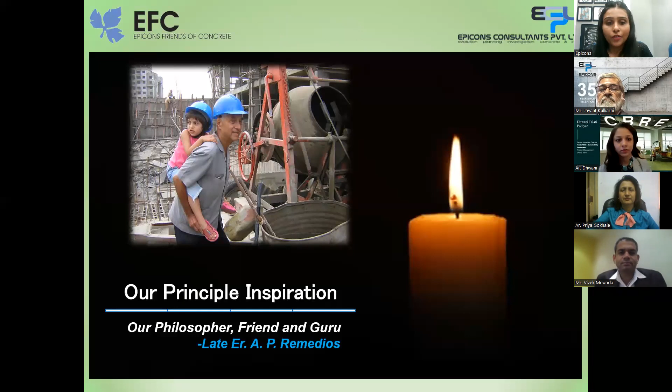Our principal inspiration, a philosopher, friend, and guru, was late engineer A.P. Remedios. EFC has conducted 79 workshops in the last 21 years and 32 webinars in the last 2 years. We started the webinar series since lockdown through our unit EFC dedicated to training. EFC is a humble effort to create a knowledge sharing platform and develop a facility for continued education for practicing architects, structural engineers, corporate consultants, government and semi-government authorities, builders and developers, faculties and students.

This is a timeline of our previous webinars conducted, and today we are presenting before you our webinar 132, Think Beyond Green, Part 1.

This is team EFC, our pillars of team EFC. So Mr. Jayant Kulkarni, our managing director, our directors Mr. Anand Pulkarni, Mr. Ravindra Deshpande, Mr. Arvind Parlekar, and our unit heads Mr. Parashar Moghe and Mr. P.P. Pandey. Thank you so much. I would request Priya ma'am to please continue ahead.

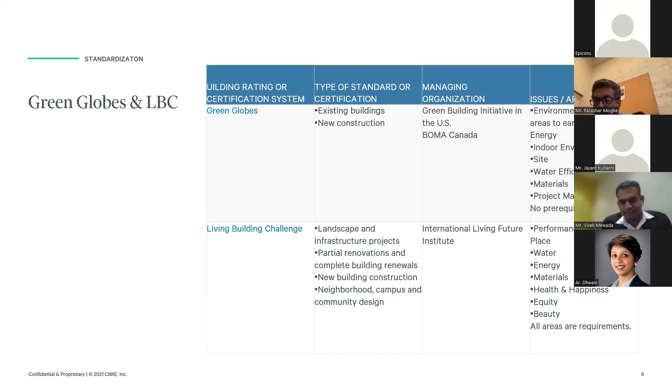And that's what you can all put together to call it a good vibe. There are various certifications around it. Like WELL certification is one of them, which is a global certification. In fact, I happen to be a WELL AP when in India there were only about 13, 14 WELL APs. Now there are many more, and it's become almost a given for most multinational companies to go under a WELL certification.

It's administered by the International WELL Building Institute. And this, so to say, is the good vibe I was talking about. It touches upon various factors like air, water, nourishment, which is quite often ignored and forgotten, but an important part of well-being. When it comes to the built environment, what you serve in the canteen, how is it stored, and what nutritional messaging are you giving to your employees or inhabitants of that building or space through the design.

Biophilia, light, movement, thermal comfort, sound, material, mind, community, innovations - these are just some of the factors. They all seem like words at this moment, but give each word a moment to think about how it can impact the built environment. I can go on with this, just wellness and health being - I'm personally passionate about it and what it does to design.

What are the factors we can keep in mind as architects and engineers when designing a well building, a well space, or a well factory for that matter. But I'm not going to go too far into this. I still have Vivek also covering some site related aspects.

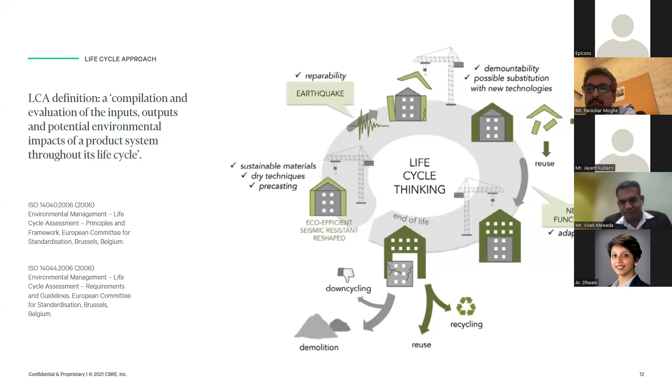The other would be being very footprint conscious. When we talk about footprint, very simply put, when you're walking on the beach, the footprint you leave behind means where you walked, how you walked, and how much pressure you put on the sand. Similarly, when you build something, there is a footprint you leave behind.

That is the amount of emissions you leave behind because certain materials were transported to the site from a longer distance than what it could have been if it was local. It's just one example, but across the life cycle there is a footprint you leave behind, and the smaller the footprint, the lesser impact you have on the environment. It is not rocket science, but this is very often ignored, and we should be very conscious about material selection and the processes we use during construction.

We can do this either through offsetting the energy, using green energy, so to say, solar energy, wind energy, etc., or offsetting it by generating energy in a green way in another location and offsetting its credits, reducing carbon emissions and energy use in general, through recycling and reusing. None of this is rocket science, and these are not new concepts, but it's important to put them in perspective of a built environment and a construction site, so that we as engineers are more conscious the next time we are on site.

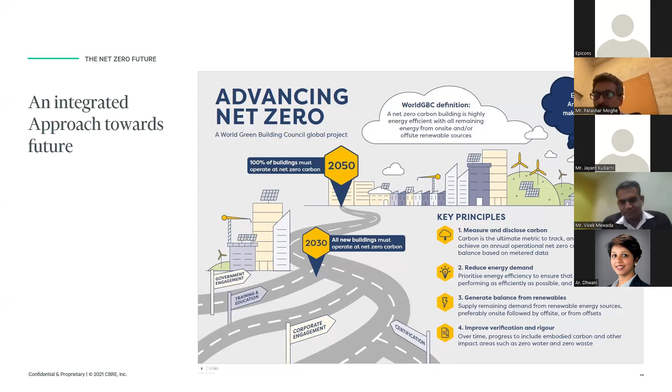This exercise should not be a one-time exercise where you've constructed, built, and forgotten about it. There should be a more regular, either quarterly or annual, performance monitoring. In fact, a lot of companies like Barclays, for example, that we're working with, have made it live monitoring, not doing it annually but doing it live, looking at performances. If there are any live tweaks needed, or a shutdown required because you are surpassing a certain baseline, those actions are taken immediately.

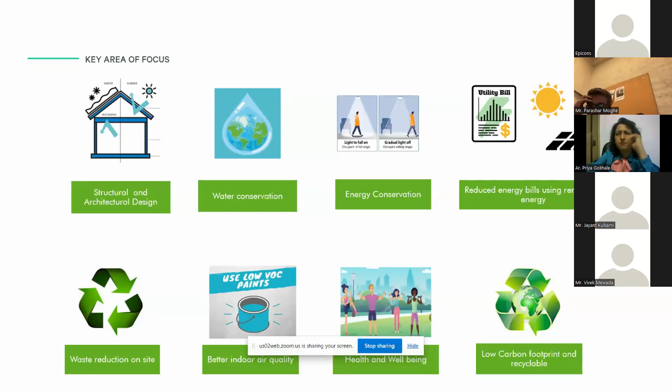Water conservation - okay, you have selected a tap, but are we saving the water? Are we preventing the leakages? Energy conservation - yes, energy is used for construction, but we have to look for every attempt to save energy on site, the usefulness of the energy which is there. Renewable energy, though on a site it becomes a difficult aspect, but we have to look forward to how we can incorporate renewable energy on site during the construction phase. I know everyone is aware how to source renewable energy during operation, but during construction stage, how do we harness it? I'll be talking on that in a bit.

Apart from that, waste is the most important aspect we have to look at. The quality of air which a person experiences on the site - it's not just work, but the kind of air going into the construction, affecting all the multiple stakeholders on site, the site engineers, the laborers, the workforce.

So the quality of air which is being brought into their body, what is the quality of air? And health and well-being - it's not only work, but how we take care of the health and well-being of the employees as well as the site workforce. That is also one aspect which I'm going to touch on.

At the end, something which Dhwani had described as life cycle analysis during her presentation - I'll be touching on the low carbon footprint and the recyclability of materials as one of the topics. So coming to the first aspect, the materials.

As a person, when we are on site, we go multiple times for material inspection. We go to the factory for checking the materials, what is the quality of the material and all. So yes, first thing is the quality and the desired specifications we require to meet. Yes, we put a tick box, but very few times do I look at the material from the sustainability aspect.

Or from the environment aspect - how local is the material, local in the sense how close it is to the construction site. That is one aspect which should be added while assessing any materials.

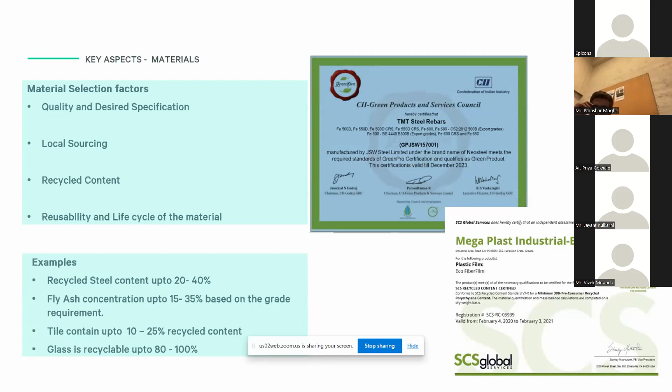Glass is almost recyclable up to 100% extent. If it's clear glass, yes, 100%. But when you go for colored glass, there are some limitations with respect to recycling, depending on the exact color and type. But yes, glass is almost 100% recyclable. I'll try to address this in waste management, how we take care of it.

On-site design has multiple parameters. I'm just touching upon 2 to 3 aspects to give you a flavor of what we should look at. During the construction phase, the water from the site, especially during the monsoon season, has very high runoff, and the topsoil is usually the one most affected by that. So incorporation of a silt trap basin in the design helps to arrest the topsoil to a considerable extent.

Apart from that, the topsoil which we are using by default, we can stockpile up to a certain extent on the site. The reason for focusing on topsoil is that it is the most fertile soil in the entire land, because it contains minerals in the highest proportion. So we need to stockpile that, cover it with tarpaulin or polythene sheets, and save it for later use during the project execution.

Coming to solar installations, a practical problem we always face on site is that at times solar panels are just placed for environmental compliance sake, or just because the client has said he wants to install solar. They don't look at what angle they are inclined to, or whether there is any shadow coming from the OHT tank or from a nearby structure. So those are the principal on-site factors one should look at while installing solar panels.

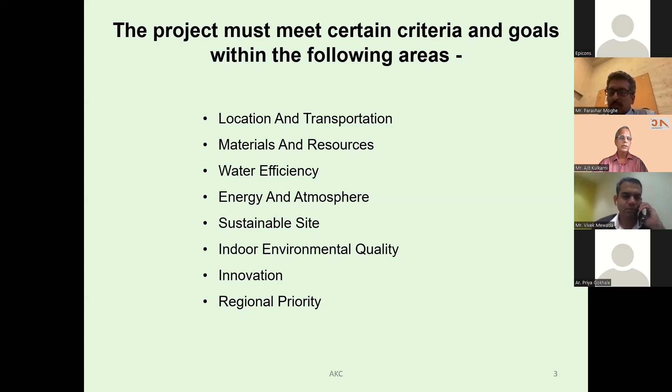So as we know, let me quickly say about the green topic. This initiative was started by LEED. If we want to achieve credit points: 40-49 is certified, 50-59 silver, 60-79 gold, and 80 plus is platinum. We must have certain criteria covering location and transportation, material and resources, water efficiency, energy and atmosphere, sustainable site, indoor environment quality, innovation, and regional priority.

What we actually get is something good for humankind: CO2 emissions about 34% less, energy consumption nearly 25% less, and water consumption 11% less. We also get a healthy atmosphere, efficient facility, cost saving proposition, and many more. So it's not only the LEED certificate we are going to get, but what we give to humankind, the necessity and requirements that are there.

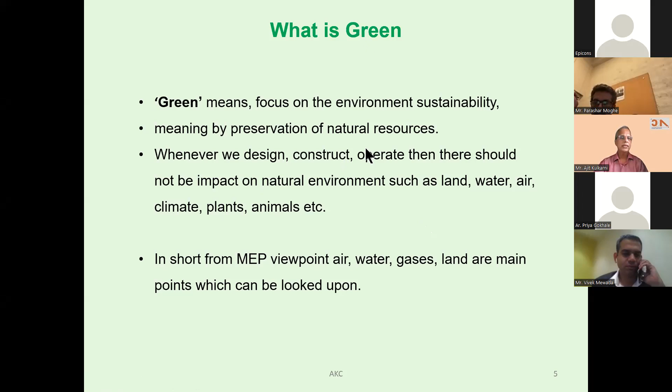As Dhani has already mentioned, by and large green means focuses on environmental sustainability. It means preservation of natural resources. So in design, construction and operation, there should not be any impact on the natural environment. As a designer, I have to see that land, water, air, climate, plants, animals etc. will not suffer. So in short, from the MEP perspective, air, water, gases, land are the main points which have to be looked upon.

Now along with green, there is a lot of confusion in the general person about sustainability, carbon footprint and efficiency, where it fits. So sustainability is nothing but reducing the environmental impact and considering the human health factor. You have to consider natural production of energy which will not harm the environment, use energy that can continue forever, and not disturb natural resources, which is important.

From the carbon footprint point of view, it's the amount of greenhouse gases such as carbon dioxide, methane etc. which we release into the atmosphere while designing. Also we use CFCs and other things which are very harmful. And from the efficiency perspective, we have to make sure the efficiency is very good, rather than just maintaining the LEED perspective.

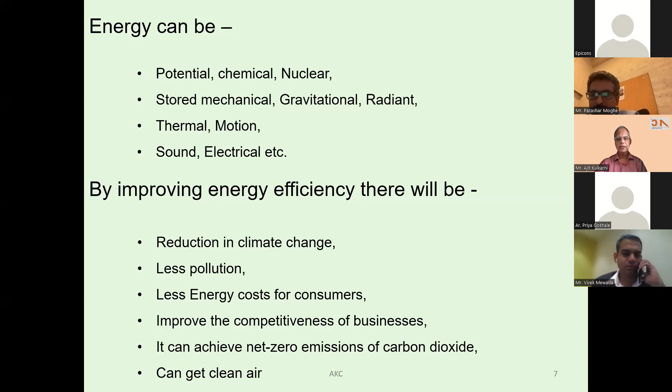This is after having the Bhadla plant, which they made in Rajasthan. We improve the competitiveness of the business, get a net zero emission of carbon dioxide, and cleaner air. So therefore, we have to redefine this green a little bit while designing, constructing and operating.

One point is to improve energy efficiency. There has to be some environmental sustainability, preservation of natural resources, with minimum impact on land, water, air, climate, and plants. We have to consider the human health factor, use natural products and energy which will not harm the environment, use energy that can continue forever for the long term, and reduce the use of greenhouse gases which affect human beings.

Now we have a lot of technologies available which we are also implementing, but to cover all these points and fit them into half an hour from the MEP perspective is very difficult - it's really a Herculean task. But allow me to touch upon some new trends happening, since we are going beyond green. I would like to touch upon new things which are happening, or which are not happening but which we will implement, and developments happening in the sector in future. This will become an interactive session too.

It will be interesting for everyone, because all of us know about rainwater harvesting, solar, wind etc. But there is something else we must now look after, because of the new era we are going into. There are certain available technologies, but we are still not practicing them fully - we are not practicing even rainwater harvesting 100%.

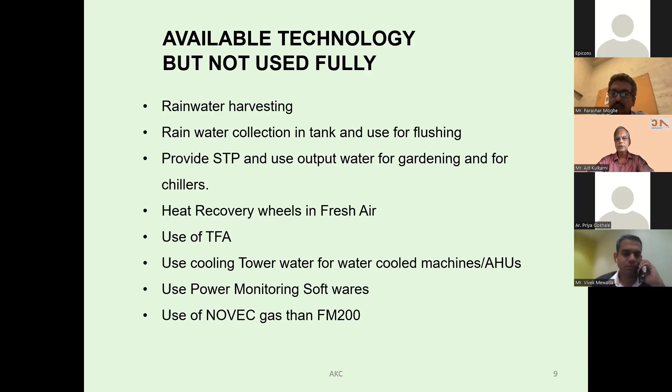Then there's Novec gas, as all of you know, instead of FM200 which is CFC related. Novec is a clean gas, so by using it we can reduce the carbon footprint and ozone depletion. Then there's another topic of discussion—fabric ducting.

GI ducting versus fabric ducting is the new technology coming up. At certain times and locations we can definitely try to use it, whether at a warehouse or at an exhibition hall. Then VFDs for motors—if we put them on small motors, there's a lot of saving that can happen, yet we are still apprehensive about using that.

The power factor in the electricity industry is another topic to be discussed at length—you could spend at least one full day on power factor and harmonics. But improvement has to be done here so that your energy consumption gets reduced.

This widely discussed topic—solar water, solar panels, wind generation—we can definitely use, utilizing whatever extra galleries, ceilings, or terraces we have, and the roof of the industry, to reduce consumption. I have examples where this has been installed and implemented; in one factory, zero electricity is being used and the entire power is coming through solar panels.

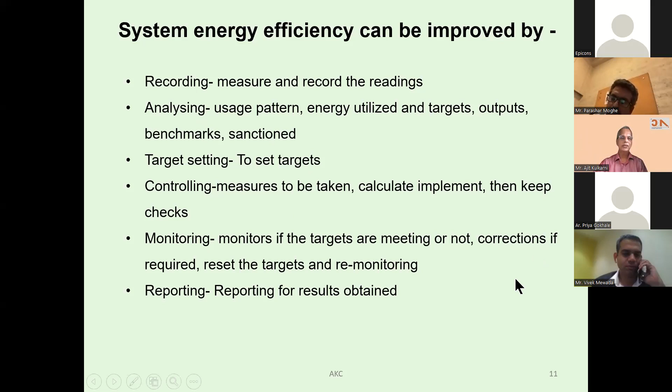Otherwise, many times we put up a wind energy setup and subsequently we land into only 5 or 10% savings, considering the energy that went into creating that equipment and the material used there. So therefore, efficiency is one part which I would like to touch upon.

And before going into that, I would like to go into a few terminologies. Now, efficiency, when we say motor efficiency, if we consider, it can be 70% or 95%. Now, suppose efficiency is 70%, then electrical power will be drawn by 107 kilowatt.

Before coming to this slide, I would touch upon these 2-3 lines for the benefit of all the participants. Whereas when your efficiency is 95%, then the electrical power gets reduced down to 79 kilowatt, so a direct reduction of 20%. So do you mean to say we should start changing the motors, scrapping the machines?

No, not at all. Wherever it is possible, we should replace it. But if it is a new thing, then definitely we can think upon how we can do this efficiency improvement into that.

Now the main thing which is happening is, we have to think in a different way, because we are in the area and era of digitalization. So can we make this efficiency-related business, instead of writing and putting it onto a platform and being dependent upon human technology, can we do something over here? And therefore, this is the new thing which we can definitely come up with.

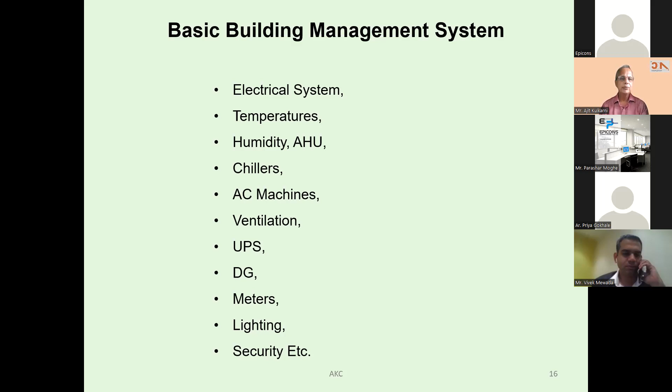So this is a very basic building management system which we are doing, not compulsorily, but sometimes. There is an electrical system, temperature, humidity, AHU, chillers, AC machines, ventilation, UPS, DG, meters, and lighting. This is the absolute BMS machine.

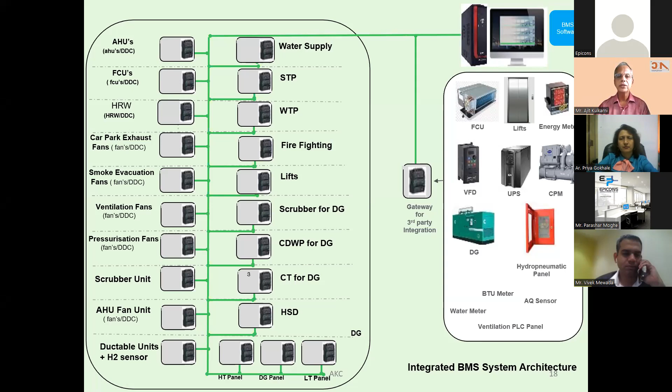So with this we have arrived at some BMS, which is a higher technology. And the further advantages which we wanted, we were not getting, we intend to get in the future technology, which is Industry 4.0, which is yet to come into the market and which will be the future.

So what we get over here, this equipment can be monitored finely. You can have the operations verified minutely. Performance can be checked and monitored. Data can be used for predictive maintenance and performance.

Now this is a very important thing. There are certain things we always provide, okay, I have provided a fire pump. But unfortunately, during the last fire which happened in Mumbai, the fire pump itself was not working. This is a very sad story. We talk about lots of things, standards and all that, but when it comes to ground reality, it doesn't work.

We talk about STP, okay, I want this STP and the output has to be connected for the chiller etc. But really, whether it is working, whether the material is there, what is the output, what is the yield over there, that is not being given. At any given time, if the shaft breaks, then the motor will not function and you are not getting things. So that's the predictive maintenance you can get from it.

Then there is another thing, asset life and value to be checked. You have got a lot of assets, many assets, crores of rupees of assets, billions of rupees of assets, so many solar panels. Where are they now? What is their individual condition? What is their value, and whether they are functioning or not, that is what we want to check up.

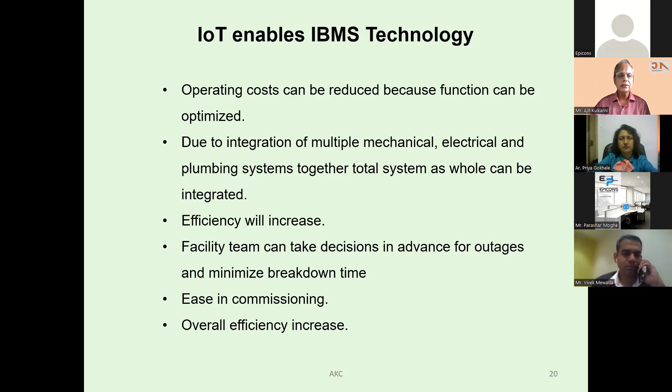This is what minimizes the breakdown, this is what I have based this upon. Many times urgently we have to take certain decisions, and IT people or the client don't give the breakdown. At that time we have to take decisions, and those early decisions, the downtime reduction, and the loss of revenue which is happening can be addressed with reference to this. There's an ease in commissioning, and therefore it improves the overall efficiency of the organization.

So this is where we are. I will not go much into the technicality. I know there are a lot of architects, structural consultants, PMCs here, but it is necessary for all of them to understand this small level, what we call the site level, wherein all the MEP related equipment is there, be it DG or HVAC, chiller, etc. So that is called the third party, and that is called the field level.

The second level is called the management level, wherein there are various softwares, and all these third parties are integrated with each other. Now BMS has got their own function. EPMS, meaning Electrical Power Management System, has got its own system. This DCIM, Data Center Infrastructure Management System, will have their own software.

Now all this software will start collecting the data at the field level first, then they will talk with each other, and overall they will feed into the BMS system. And not only that, further they will be connected onto the cloud, and therefore this IoT as a managed service will be available at the cloud.

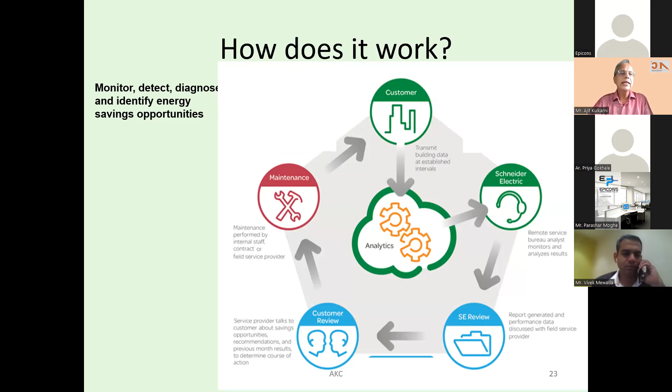They will collect all this data, which was given to the client, onto the cloud, for the client. So it will work on the customer side. You have remote sensing, report generation, service provider customer views, maintenance performance. So you get to monitor, detect, diagnose, and identify the energy saving.

Now what you get in a nutshell, if you see the last column, the outcome is nearly 33% reduction. This has been analyzed worldwide in a few sections. 20% reduction will be there in energy cost. You get reduced unscheduled maintenance of 29%, and 80% of the problems will be resolved remotely, which were not being done up till now.

How it will happen is that it will be monitored. The analytics which will be built in by any organization will do the analysis, the report and collaboration will be done. The remote support will be available to anyone, and then on-site management is there. So it is machine-to-machine talking, machine to human talking, human to human talking, and human to machine talking. So all these platforms are on one side.

Do you mean to say we are going to eliminate human intelligence? Absolutely no. We are going to utilize the human brain very efficiently, but we are making all these machines work. Up till now we were working for them; now we'll ask them to work for us and give the respective data so that we can get increased occupant comfort, reduce operating cost, and improve asset value.

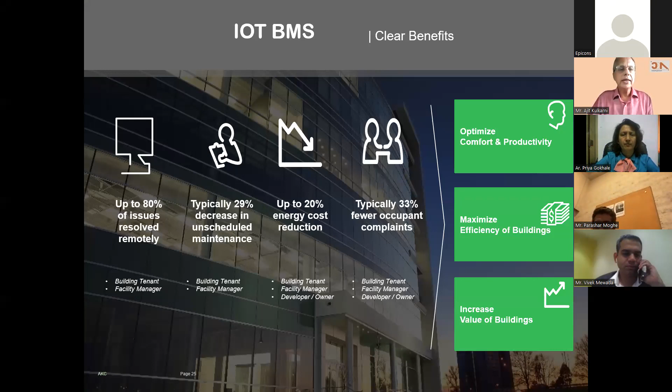We were over here. So in a nutshell, we are going to get nearly 29% unscheduled maintenance, 20% energy cost, 33% into occupant complaints, and 80% into the things.

Now this time and era is a global village, as we call it. So somebody is sitting in the US, somebody in Singapore, somebody in India, somebody somewhere else. The management could be different. Somebody is talking to their management in Bangalore from Boston, as Obama has mentioned. So everyone must be aware of what is going on at every site.

So being on the secure cloud with the security available, and through all the gateways, what we are going to collect - desk occupancy, ceiling occupancy, air quality, people count, people flow count - all of this will be available on the universal platform. So any decision at any level can be taken.

There is no necessity of taking a decision separately - this is the available thing. Whatever data you want to get out of it, any organization can do that, and subsequent to this, we can make it available. So this is as far as IoT is concerned.

I think I will now shift a little bit to the upcoming lighting management system.

Once we say lighting, go ahead, sir. How many minutes to go? 5 minutes. Oh, my dear friend, sorry, then I think I may have to wrap up quickly.

So this is a new lighting management system, wherein we have got energy saving, daylight harvesting, color changing, visual comfort, dimming, scene selection, human centric, asset tracking, and space utilization.

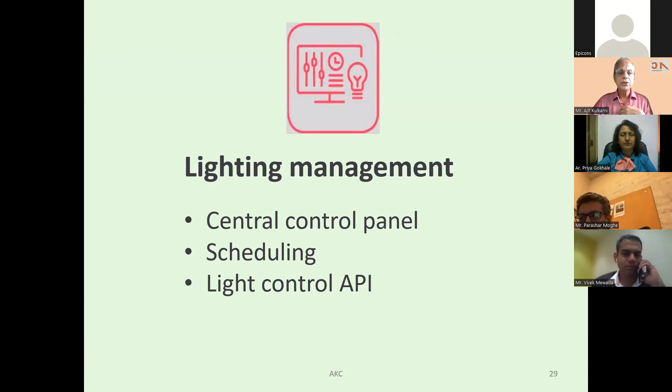What we are going to get out of this lighting management is a central control panel, scheduling, light control API, lighting asset management, maintenance information, alarms, automatic notification, and automated emergency testing.

You can get energy optimization through lighting behavior, daylight harvesting, energy dashboard, and energy analytics. All these I can take up in your next question answer session. Scene management we can do with this energy management.

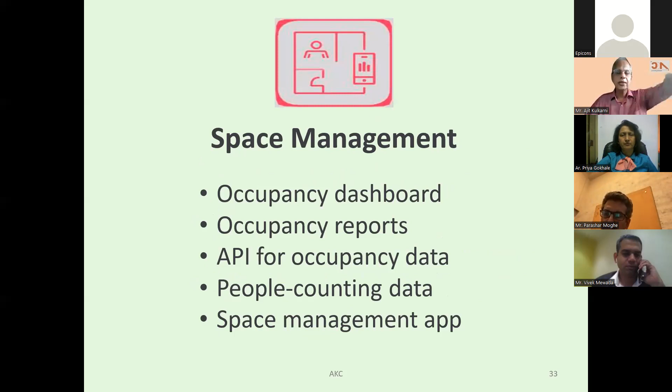The space management is a new trend wherein hot desking is there. You need not have one particular cabin or one particular desk. You can select, and for that you have got software available to you, along with indoor navigation, so that anyone can sit anywhere.

Then there is a bioadaptive light. This is a tunable white light with a program, so that everyone becomes efficient. Environmental monitoring for temperature, humidity, and all that can be captured through this.

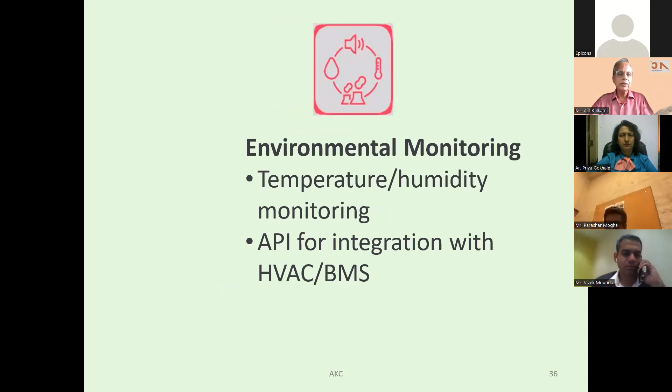There are intelligent sensors in the light fitting, bundled into the advanced sensing platform. We are going to get room temperature, occupancy detection, relative humidity, daylight measurement, desk occupancy, people count, temperature, noise level, indoor positioning, and navigation.

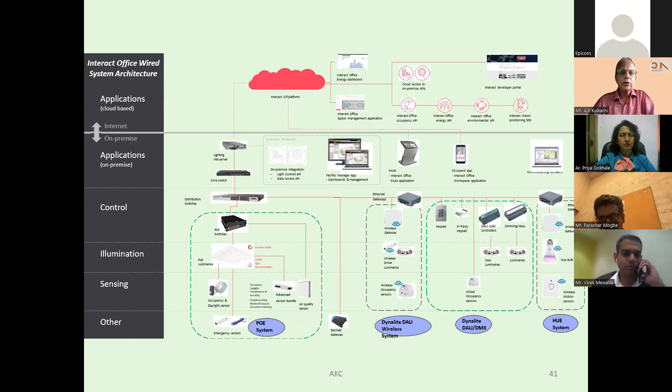May I request 5-10 minutes more, Jayant Kulkarni or architects, Gokhale, please? I think we can give 5 minutes, there is no issue. But still, if you limit to 5 minutes, it will be better. Okay, anyway, thank you for that.

Safer and more productive environment is what we can get from this. We can get improved staff efficiency and minimize energy consumption.

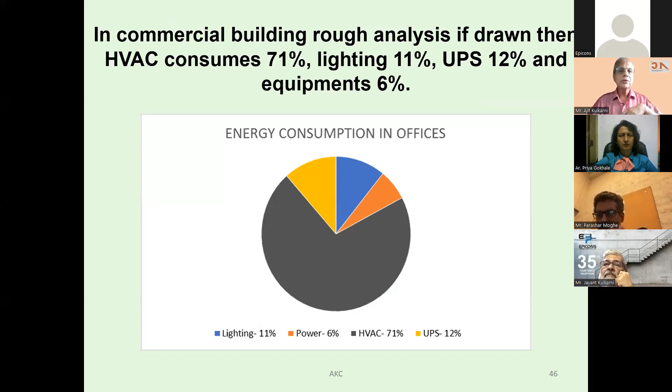Now, this 5 minutes which I wanted is for HVAC consumption. HVAC consumes nearly 71% and it's a big guzzler in our industry. So out of that, we can get VRV, which has got lower tonnage kilowatt per ton, as I mentioned. We may opt for it, or whenever chillers are there, we can go with water cooled chillers.

We can also obtain further HVAC efficiency through insulated walls and ceilings, reducing heat generation from lighting, and designing spaces to avoid losses through leakages. We can use double glazing with lower emissivity windows, and we can use blinds.

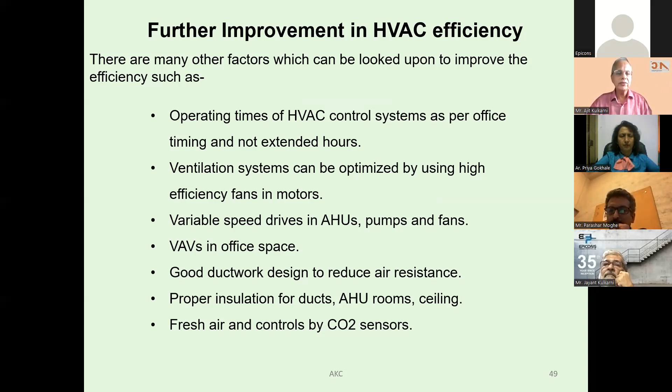Temperature can be increased a little to 24 degrees. We can go with operating times, so that whenever people are going to come, at that time only we start the chiller. The ventilation system can be optimized, variable speed drives of the AHUs can be used, VAVs will be there, ducting work can be done properly, proper insulation can be done so less tonnage will be there, and fresh air will be there with CO2 sensors.

This is a new thing which I will just take 1 minute on. This is absolutely new, 2022, it has been introduced.

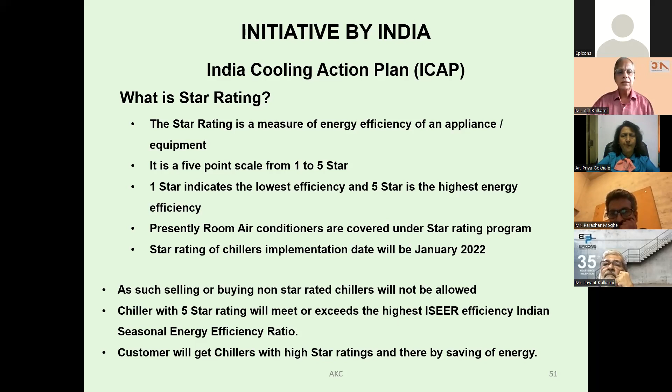All the people who are using chillers can put this into service. This is the 1 to 5-star system which has been brought in by the India Cooling Action Plan. So whenever you are going with a chiller and ordering a chiller, ensure that you are getting a star rated chiller, so that you can get high efficiency and less kilowatt consumption.

There is a new thing, as you are aware, BIM, which is Building Information Modeling, now getting adopted where architecture, structural, HVAC, electrical and plumbing are coordinated. Clashes are found, and BIM is now widely used. This is a new trend.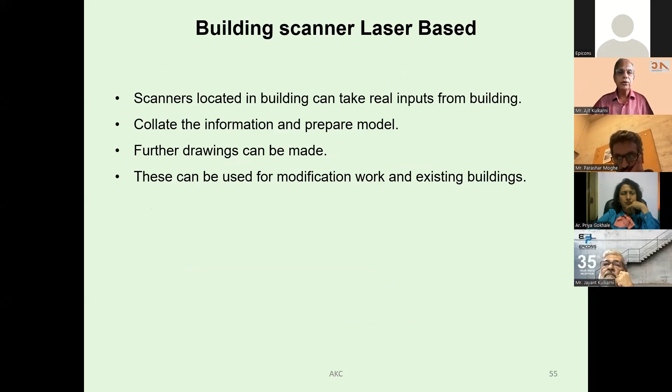Then building scanner and laser based technology, this is a new thing coming up in the future. These scanners will be located in the building, they will take real inputs where drawings are not available, collate the information and prepare the model for you. So you get the drawing available to you, and if you want to do modification, you have it.

So, concluding remark: energy is a major input for economic development for any country, and energy is required. Hence, in any case, the energy sector is very vital.

Today's luxury will become tomorrow's necessity. Once upon a time, the fridge was a luxury, now it is a necessity. What is in our hands is to increase efficiency and the technology to be used for the same.

Surely, we have the responsibility to leave for the future generation a planet that is healthy and habitable for all species. This is what Sir David Attenborough has said, and we have to strive for his words. Also, this has been said by Mahatma Gandhi.

At the heart of NCC is a similar passion to do the new, to make an everlasting contribution, to author a bit of history, a great story that never ends. Starting off as Nagarjuna Construction Company Limited, close to 4 decades ago,

It is visible, right? Hello? Hello? Yes, it's visible. Okay. Visible and audible too. Okay.

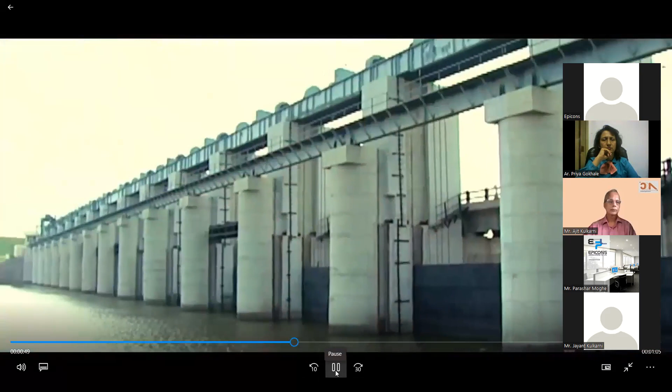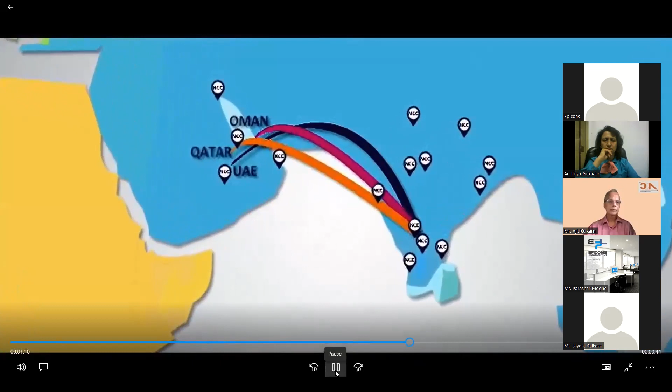We have worked unceasingly to expand our capabilities, our scale of operations, and our reach. Rechristened as NCC Limited in 2011, we are today a multifaceted infrastructure group with several focused divisions whose activities span the gamut of infrastructure space. The NCC saga has thus far unfolded not just across the length and breadth of India, but also on the international shores of UAE, Oman, and Qatar. The company's projects in the sectors of buildings and housing, water and environment, electrical, power, roads, irrigation, mining, metals, railways, and international have made it an integral part of India's infrastructure landscape.

At NCC, history is being created every moment. History that we can actually use to change the course of tomorrow.

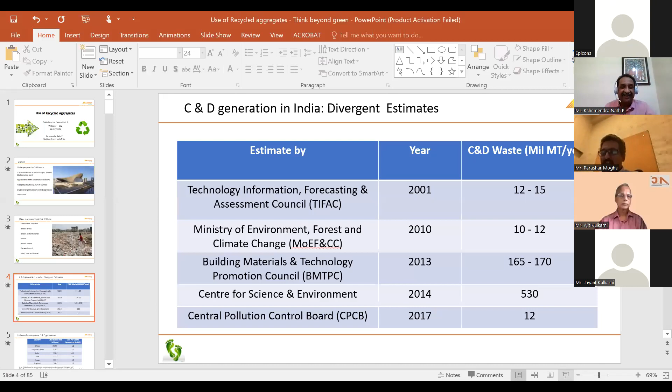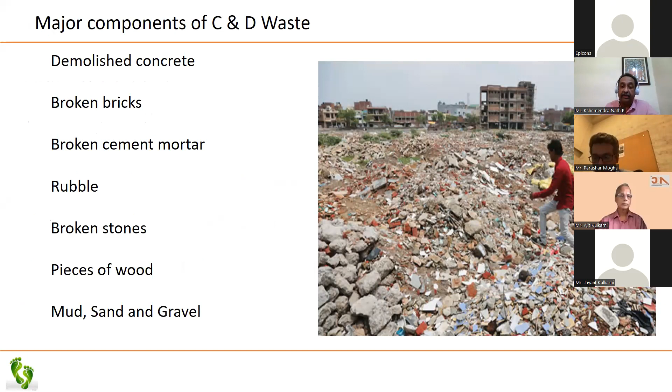This is how normal demolished C&D waste looks like, all mixed together. This is the biggest challenge a construction demolition waste management plant faces, and we are going to make recycled aggregates out of this.

If you look at the estimate of total C&D waste generated in India, it depends on which agency you talk to. The estimate ranges from 10 million tons per annum to 530 million tons per annum, a difference of 5,000%. This tells us how little we know about the waste we are generating, and if you don't know that, it reflects on what corrective action can actually be taken. It hasn't been scientifically looked at.

If you were to ask me where I'd pitch our total construction demolition waste, I'd say it's even beyond 530 million tons per annum. Why? If you look at C&D waste generation in other countries, China talks about 2 billion tons a year. By comparison, India at 530 million tons, on a per capita basis, is still at 0.4 tons per capita. Even if our construction activity isn't as big as China's, it's much bigger than the USA or Europe, going by our cement consumption.

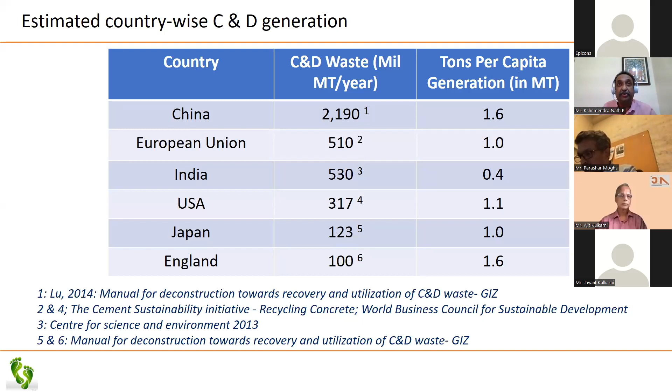So I feel our C&D waste generation must be much higher than 530 million tons, but that's speculation. We were associated with the Government of Goa to estimate the C&D waste generated in the state, and we also gave a blueprint for scientific waste management. In that process, we analyzed the waste stream and volume produced in Goa. It started with GWMC saying they wouldn't be producing more than 100 tons a day, but our scientific analysis came up with a figure of 525 tons per day. This shows how far we underestimate the generation of C&D waste.

Now, why is it important to understand and estimate this, and why is it important to control it? This waste is inert and doesn't smell, so we don't associate it with waste the way we do municipal solid waste. But it damages the environment to a very, very big extent.

Why is it environmentally damaging? Because this waste finds its way into filling up water bodies and low-lying areas. The National Capital Region alone lost close to 1,500 water bodies due to the dumping of C&D waste. Many water bodies in Mumbai are under threat, as are those in Bangalore, Hyderabad, and elsewhere. This is a very big environmental issue, and unless we take corrective action, it will create huge damage that we don't yet understand.

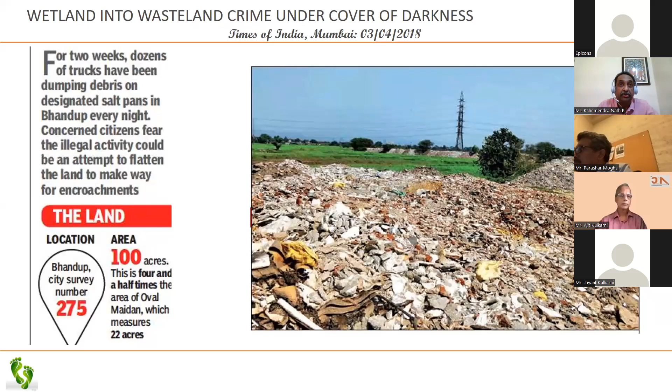This is another picture, familiar to those who know Mumbai, of the salt pans on the Eastern Express Highway where C&D waste is being dumped. People are apprehensive that this will be used to create encroachment into the land.

When we do this kind of damage to the environment without even thinking - C&D waste may not be the real reason, but C&D waste is used because it's the cheapest material to fill those low-lying areas. And then we complain about BMC not doing anything to control the floods. We are all equally responsible, and every one of us has got to see to it that we create solutions for ourselves rather than blaming government bodies.

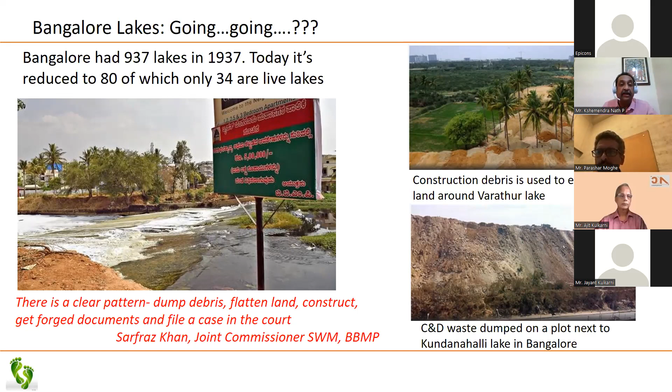Indiscriminate development has been a major problem in the whole world. From Dubai to China, reclamation is a very popular development model. Why? Because it's cheaper to make artificial islands through sand filling than buy land. We all know about these huge paradises made in Dubai, like the World and Palm Beach. 500 million tons of sand has been used to develop the World - that's equivalent to 20 million trucks. One-fifth of Singapore has been artificially added, with plans to grow another 100 square kilometers.

Sand mafia is the most organized criminal activity in the country. Just a couple of days ago, you must have heard the news that a high-ranking police official in Haryana was run down by the sand mafia. In Vasai Creek, near Mumbai, around 75,000 men work as illegal sand miners.

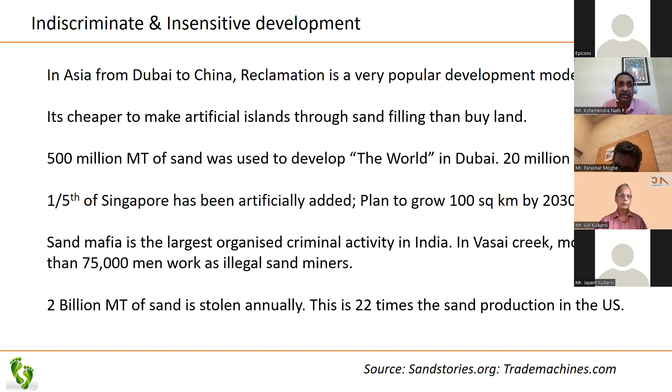So we have a lot of issues related to environment, political issues, and law and order issues. Sand and aggregates are the second most extracted resource in the world, even nine times more than crude oil. Aggregate demand has grown 360% in the last 30 years. China has used more cement in the last two years than the USA has used in the last century.

So this is the kind of development activity going on in this country. And if you look at the statistics in India, we will also find a shortage of aggregates to meet its projected demands. The BMTPC estimates that we'll require around 600 billion bricks and 400 million cubic meters of aggregates, plus another additional 750 million cubic meters of aggregates for road construction.

So where are we going to get all these aggregates in the future? Sand is not an unlimited resource, and we are depleting it at an enormous speed. So consider this - on one end, we have a huge environmental problem created by non-handling or mishandling of C&D waste, and on the other side, we have aggregates, which are a depleting resource, and we all know we will not leave enough for the next generation to build.

So this is why using recycled aggregates matters. I've said all this to set the scene for you to understand how important it is to use recycled aggregates for sustainability.

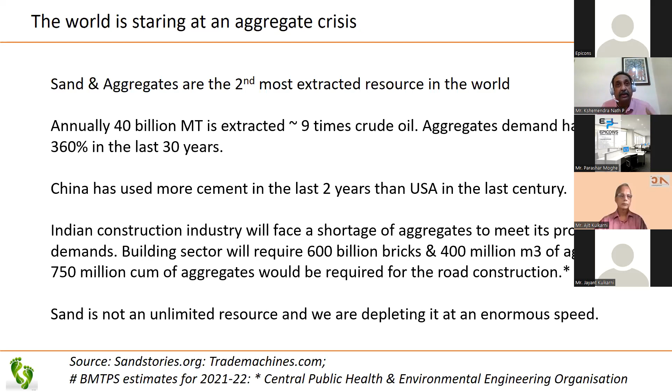20-25 years ago, if somebody were to say that river sand will not be used in construction and we would only use crushed sand, we would have mocked at him. Today, that's a reality - we don't have enough real river sand, it's no longer available. So we are in a changing environment, and we have to adapt to the situation.

And so a circular economy approach is the best way to resolve these issues. What's a circular economy? Instead of a linear economy where you extract, use, and dump, you produce demolished concrete that is used for recycling and put back into construction. Not more than 5% of the material goes into wasteland or landfill. This is how we need to approach creating a more environmental balance in the future, and also resolve the problem of the lack of aggregates.

How do other international, in the global powers, deal with this system? If you look at the US, around 23% of C&D waste is recycled. Of course, in the US, different states run at different speeds. New York has got the most stringent measures.

They mandate segregation of waste at site and allow only dismantling, not demolition, of buildings. This is a very important difference. When you dismantle a building, you make a planned way to salvage material that can be used later, and you only demolish the concrete, which is then recycled. What we do here is demolish everything, and you get a complete mix of material. It's very difficult to recycle.

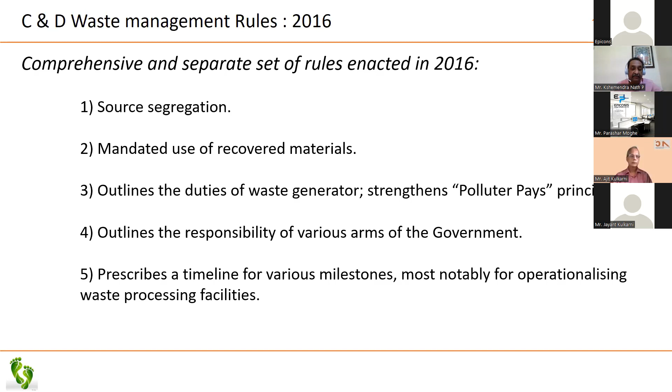The whole policy is based on the polluter pays principle. That is, if you generate waste, you have to pay for its processing. It outlines various arms of government and timelines for milestones, most notably for operationalizing waste processing facilities. It also classifies between large and smaller projects.

Any large project producing more than 20 tons a day, or a total of 300 metric tons, should segregate waste into four streams: concrete; soil; steel, plastic and metal; and bricks and mortar. This way, the chances of recovering concrete aggregates or other material without mixing is much higher, and you get more value out of the recovered material.

A waste management plan needs approval before demolition or renovation. Wonderful—we do have a lot of rules on paper, but unfortunately we do not implement these rules fully. That is where we actually fail.

I talked about demolition and deconstruction. Deconstruction is a method by which we should actually look at recovering material and making use of it. It's very important to understand this in the context of recycled aggregates, because if you don't do a proper deconstruction and segregation, you might still be able to process it, but you won't get more aggregates usable back in construction projects.

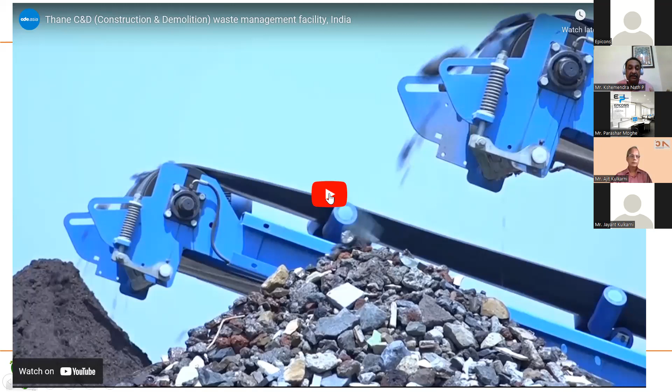But having given the background, what can we do? I would like to take you through a walkthrough of a modern C&D recycling plant. This is a plant put up in Thane, in Shilphata, under the Thane Municipal Corporation, under the Ministry of Environment C&D rules. I'll take you through it and then stop and explain so you understand this as an overview.

Now here is the plant. It's a series of hoppers and then conveyors, belt conveyors, and then you have a proper processing unit where it cleans the aggregates, separates the material, and then screens the aggregates into different sizes.

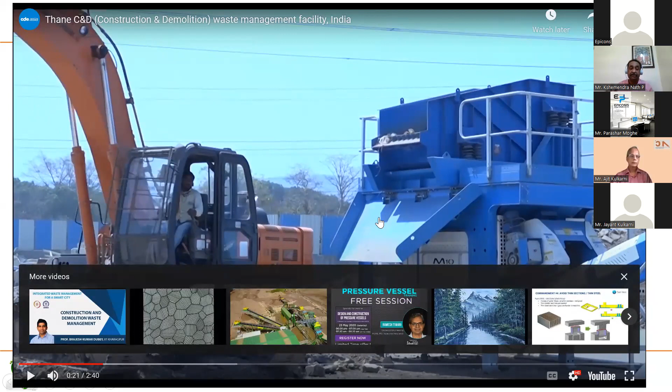Here you see the feed hopper. This is where the mixed C&D waste, which comes from the municipality, goes in, and it is fed with a grizzly vibrator. Oversized aggregates, mostly 80 mm and above, are screened off, and this is then taken out through a conveyor up there to the cleaning unit.

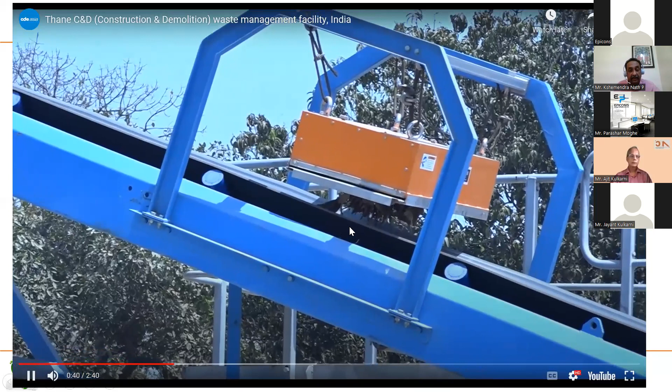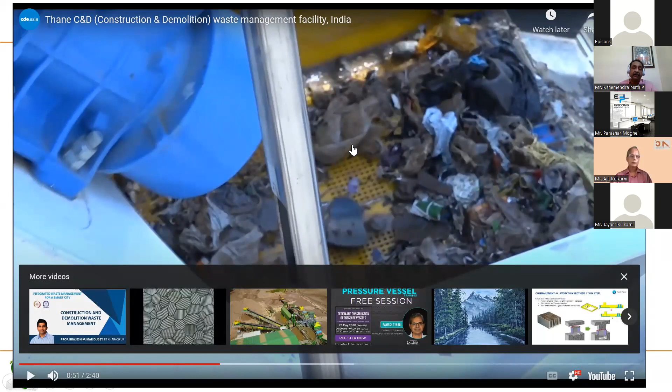What you see over here is the metal separator. You can see here a magnetic separator where it picks up the metal and other materials. It goes into a Rotomax and a log washer. A Rotomax is where the old aggregates, which have the interface of old concrete sticking onto the surface of the aggregate, is removed to the maximum. Then a log washer is where the plastic and other lighter materials are segregated, so that you then process only the good quality aggregates.

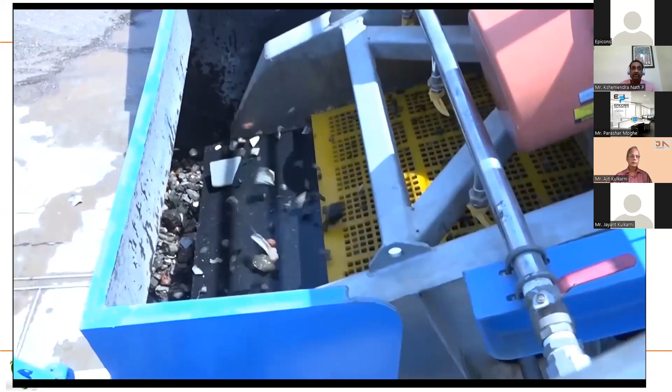So here it is, the plastic and other materials going, and then it goes through a high pressure jet cleaning system, and then the cleaned aggregates go down to a series of screens. Depending upon what sort of aggregates you need to make, 4 plus, 4 minus, 75 micron, you can make aggregates or sand, with screens from 10 mm down or 20 mm down.

So basically, there is no crushing involved. You're only processing the material which has come in by segregating the metal, segregating the plastic, and then sieving it and segregating it by the right particle size.

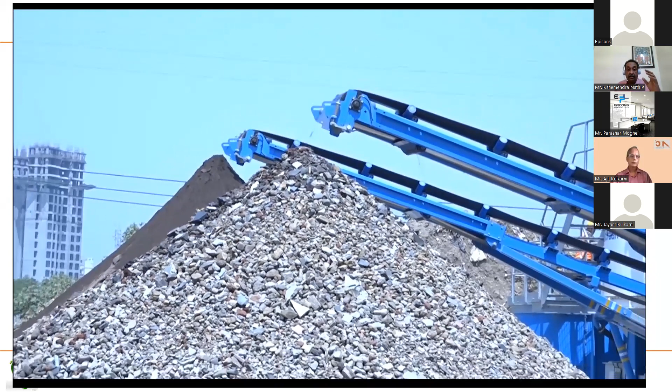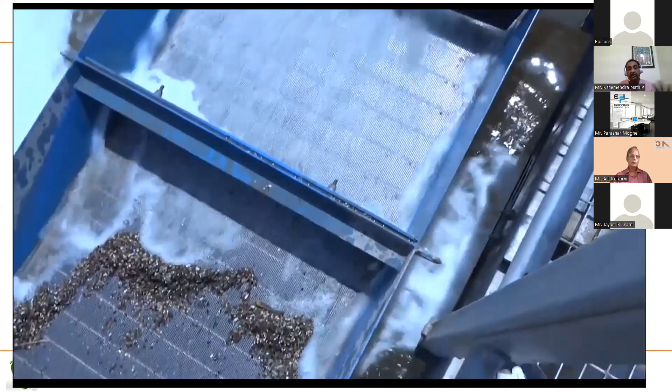After this, the material is segregated into different heaps, as you can see here. The water is then taken into an aqua cycle, where material less than 75 micron is used. Flocculant is used in the aqua cycle, and the sludge is settled and then used in filter presses, and then taken out to the dumping yard or to the landfill.

So here is this plant, and such plants have been installed in more than 10 cities in the country today, although we are supposed to have more than 40 of them operational by now.

Now, what do we see from this mixed waste that is being used? There are various things which we need to control here. If your feedstock has got mixed waste, then what you get is called recycled aggregate. You have to make the differentiation between the two. The concrete waste, or pure concrete waste, is called recycled concrete aggregate, and this is what is mostly used in construction. RCA, or recycled concrete aggregate, should not have more than 5% bricks.

Recycled aggregate is mixed waste. You can get good quality aggregates with RCA, and this is allowed to be used in concrete because now IS 383 has allowed use of RCA in some parts of the concrete, lean concrete in particular, much more than structural concrete.

So after processing, let's look at what is the input of the C&D waste. This is some statistics we have taken from an operational C&D plant in Burari, Delhi. 36% of the input material is sand, soil, and grit and gravel. You have 31% bricks and masonry, 23% concrete, then some 5% metal, 2% bitumen, 2% wood, and 1% which is all sorts of plastic and other stuff.

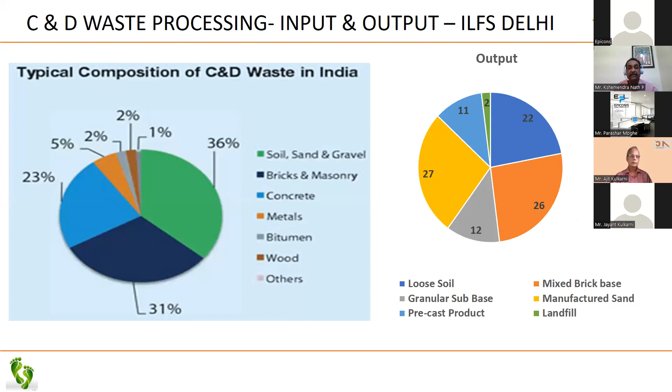If you don't have mixed waste, there's another option available. If you have a large construction site where you need to do demolition and you're more sure about the source of the aggregate because you have to deconstruct that building, you can use mobile crushing units. These are very good equipment today, equipped with soundproof enclosures and spraying systems so there's no damage to the environment from dust, with a good dust suppressing system. It can process around 50 tons per hour.

And this can also make equally good concrete aggregates. So horses for courses: if you have material which is mixed waste, it necessarily has to go into a C&D recycling plant, which I showed you earlier. But if you have a large construction site, you can use mobile crushers, which can actually make very good aggregates as well.

So this is what IS 383 2016 has allowed for the use of recycled concrete aggregates. In plain concrete, RCA as a coarse aggregate can be used at 25%. In reinforced concrete, 20% up to M25 grade, and in lean concrete you can use 100%.

But recycled aggregates, which I spoke to you earlier about, which is made from brick bats from mixed waste, cannot be used in plain concrete or in reinforced concrete, but it can only be used in lean concrete. RCA as fine aggregate can be used at the same percentage replacement as for the coarse aggregate. Now, unfortunately, the IS is not very clear about

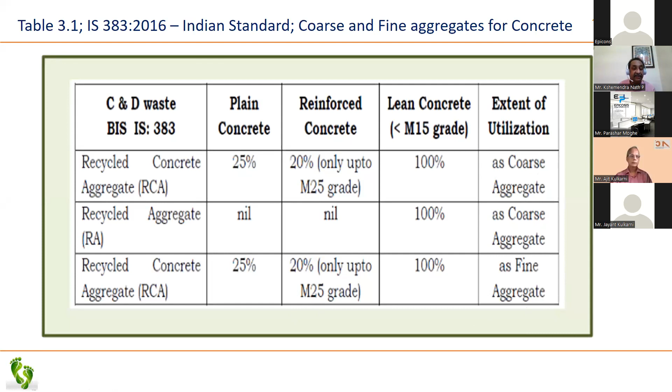whether this is either or — either you can use coarse aggregate or fine aggregate. This is a little bit ambiguous, but leave it as it is. Even if you take a 25% replacement, it's a step in the positive direction.

And if you look internationally, where the rest of the world is — in the UK, RCA is used at 20% in 20 to 40 MPa concrete, where there is no chloride exposure or freeze-thaw. Recycled aggregates, which is a mixed material, can be used at 100% only in non-structural members of 16 MPa and below, and only mild exposure.

Australia has two classes of RCA, class 1A and 1B. Again, it depends upon how pure the feedstock is. 30% is the maximum substitution, and up to 40 MPa concrete we can use. RCA class 1B has allowed 100% mixed substitution up to M25 or C25.

So this is just a snapshot for you to understand that we have made a beginning, but the rest of the world, where they have been using recycled aggregates and have a track record to prove, have been moving further ahead to increase the replacement levels. This is the direction in which we need to go as a construction industry and as specifying bodies in this country.

So where can we use this material? If only 20% can be replaced in concrete, but concrete is not the only thing used for construction. This material, for example the brick chippings made from mixed waste, can be used as drainage substrate for the green covering of gardening. Sub-base for roads is a very important application, because you can actually use this material to substitute virgin aggregates, which can then be used for better concrete.

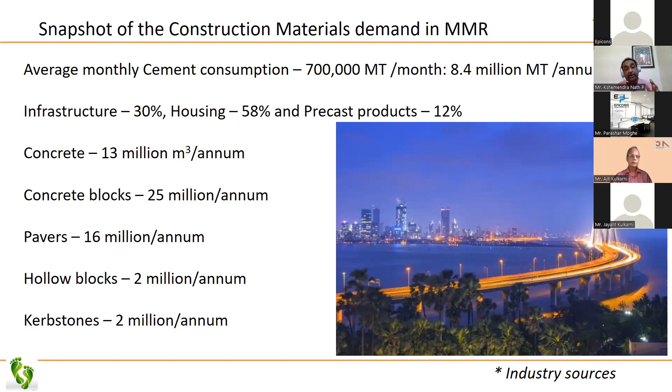This exercise I did to actually understand, if you had the potential to use all the recycled aggregates, how much of the total demand recycled aggregates can replace, and it's a staggering 30% of the total aggregate demand in MMR that can be recycled using the current provisions made in 383. That's not a small figure. So if we make steps in the right direction, we will be able to reduce the environmental impact and also preserve the virgin aggregates for the next generation to build.

C&D processed material can be highly... not as close. It will not be as close as natural aggregates. The input material source can have deleterious material. For example, if you are using material from a C&D plant, the construction demolished concrete could come from a chemical factory for all you know, and it could have embedded chemicals inside. So you can have deleterious materials, and if you don't check, certify, and have a process, you might be using these materials in a concrete which is not desirable.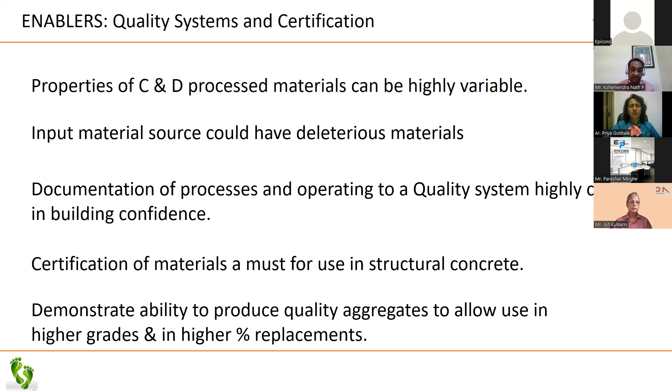We need to document the process, and operating the quality system is highly critical for building confidence, because as a structural concrete user or specifier, this is of extreme importance. So we need proper certification of materials for use in structural concrete. Once we have it, and start using it, we need to demonstrate the ability to produce quality aggregates and use them in higher grades with higher replacement. So this is the challenge we have.

So where do we need to, how do we actually make this happen? We need to have a very good quality system. We have to certify the material which is coming in, and we need to have proper documentation of the testing which is done. If we have that, then probably we'll be able to have more confidence in using the recycled aggregates.

This is some of the work we have done for Burari in Delhi, where we have done specific gravity timeline analysis of the material being produced, looking at the movement of the material and how consistent or inconsistent it is. Water absorption is one of the biggest things people find undesirable because it's got very high water absorption. If 3% is the water absorption of natural crushed fines, this will be somewhere around 8 to 9%. But as long as it is consistent, you can make allowance for that in the mix design.

But to certify that and to test it is the most important factor. Again, I talked about deleterious material. You need to also test and document the acid soluble sulfates, acid soluble chlorides, and compare it with the benchmark allowed in the IS code. So it's very important to have a robust quality system in place.

We need to monitor the materials, and only then do we have the confidence to use it. The more we use it, the more we can move to the next step, where the UK, US, or Singapore are in terms of using recycled aggregates. Do we have time to do that? I don't think we are. I really feel that we are running against time. We are depleting it at a large speed, as if tomorrow doesn't exist.

But I can tell you for sure that we need to pull up our socks and work at it.

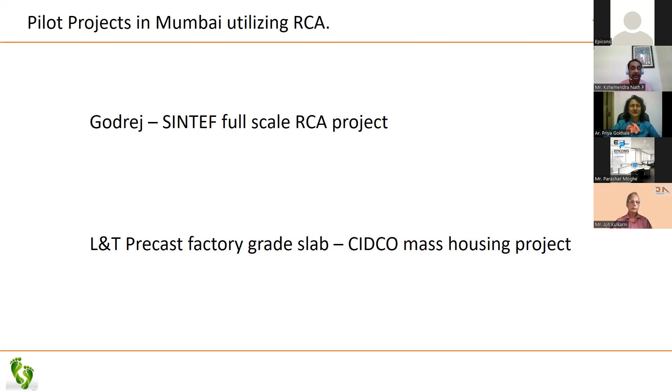I'm very happy to share two projects we have done in Mumbai. One is the Godrej Sintef full-scale RCA project. Very, very interesting project. Godrej has got a block manufacturing unit in Vikhroli, and we did a full-scale project looking into a different aspect of environmental footprint, which I'll explain. The second project is L&T's precast factory grade slab for the CIDCO mass housing. These two are live projects which we have executed, and I will go through some of the highlighting features.

In this SINTEF project for Godrej, the objective was to demonstrate the added value of using concrete blocks with recycled aggregates. So the comparison is blocks made with natural aggregates versus blocks made with recycled aggregates, and what is the advantage of using recycled aggregates in blocks, especially from CO2 binding, carbon dioxide binding properties.

This is a very interesting aspect which is currently being investigated globally, and we are documenting the technical performance at every stage. Natural CO2 binding by carbonation is a very important aspect in reducing the CO2 footprint.

Calcium oxide, we know calcium hydroxide, reacts with carbon dioxide and forms calcium carbonate. This is carbonation. In structural concrete, this is actually a cause of worry, because depletion of calcium hydroxide, which keeps the passivity level of the concrete high, increases the risk of corrosion. But in a non-structural member, especially in blocks, there is no reinforcement to protect. So carbonation is a good thing there.

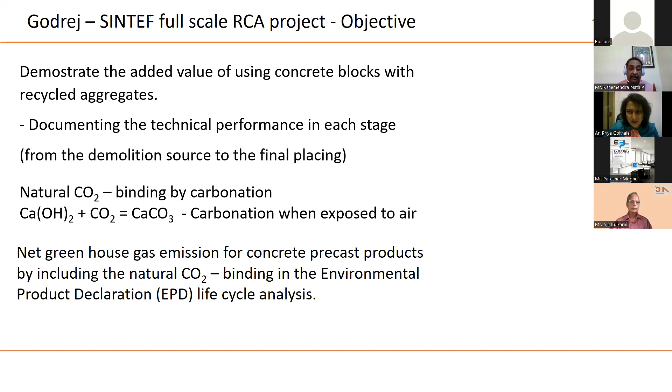We had the first speaker talk about LCA, so I don't really have to go back into explaining that, but life cycle analysis actually analyzes the carbon footprint of the structure right from the material input, through the impact of CO2 in its life cycle, and also after demolition. Now, European standards today have allowed the CO2 binding properties of the material to be used in the environmental product declaration. So if you use a material with higher CO2 binding properties, the positive impact can be calculated or factored into your life cycle analysis.

So if you have recycled aggregates in blocks, which will have higher CO2 absorption compared to a normal aggregate block, then it will improve your CO2 binding properties or your CO2 footprint.

So this is the project. What you see is a Godrej block manufacturing unit in Vikhroli. They have also got a recycling plant. It's a dry plant, not a wet plant like I showed you earlier, but they have a single source material which they can use for creating recycled aggregates out of demolished concrete.

What we did is we organized, licensed and coordinated with the demolition contractors on behalf of Godrej, and then documented the entire quality process that needs to be followed, from demolition right through to putting the material back into another structure.

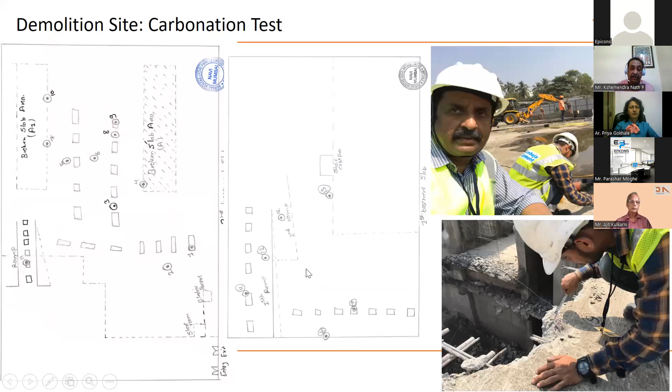Here you see the first step: we measured the carbonation of the existing concrete. We made a complete grid of the block and chose random points from which we drew samples to estimate how much of the concrete had already carbonated. We got it tested at the Bureau Veritas lab, and as you can see, although the structure was 20 years old, the carbonation was much lower than expected. Only in a few places did we see a carbonation effect.

Having documented that, we followed it up with the actual demolition and crushing of the aggregates.

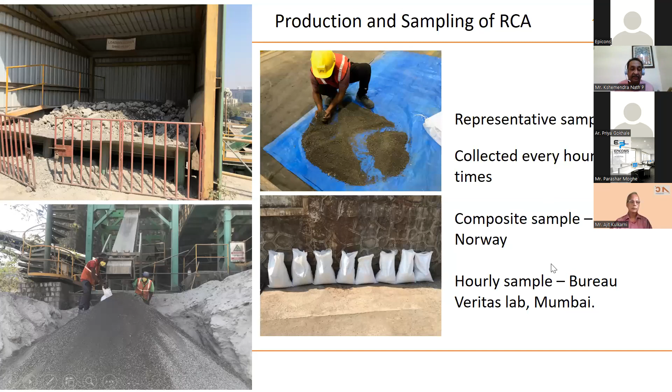We made representative samples, collecting samples every hour of production, so 5-6 times a day. We made a composite sample which we sent to Norway for testing, and the hourly samples were tested at the Bureau Veritas lab in Mumbai, so that we document the critical properties of the aggregates.

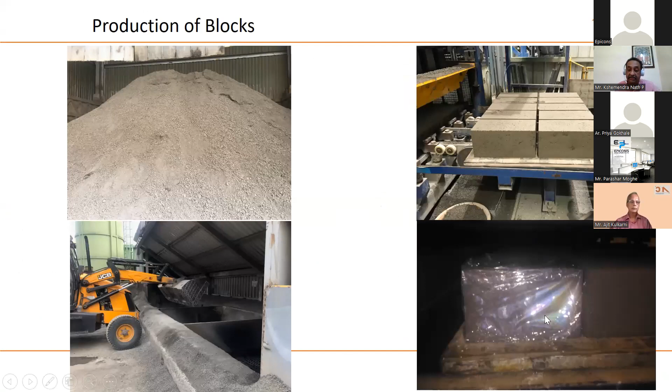This is the test certificate, and we tested this in Norway. I'll come to those test results and discuss them briefly later. So these are the blocks which were made, all passing the IS requirements for concrete blocks.

All these blocks found their way back into the metro station building at Aarey Colony metro station. So here it is - concrete demolished from Andheri, processed in Vikhroli, and back in Goregaon. This is a wonderful example of how the circular economy was put into practice. Of course this is just one particular project, and we hope to do more and demonstrate this at a bigger scale.

Carbon dioxide binding - I'll briefly tell you the preliminary results. The blocks were crushed and exposed to varying relative humidity, and CO2 binding was measured. Concrete with regular blocks had lower carbon binding ability for CO2 compared to concrete with RCA, and when the relative humidity is lower, the effect is much more pronounced. At higher relative humidity, the difference is not much, but it is still there.

The reason for this is that you have unhydrated cement clinging to the aggregate surface in recycled aggregates, and that, added to the calcium hydroxide already within the body of the concrete, gives more ability to bind CO2. This is important because in precast material, if we can bind more carbon dioxide from the air, it helps reduce the CO2 impact in the overall picture.

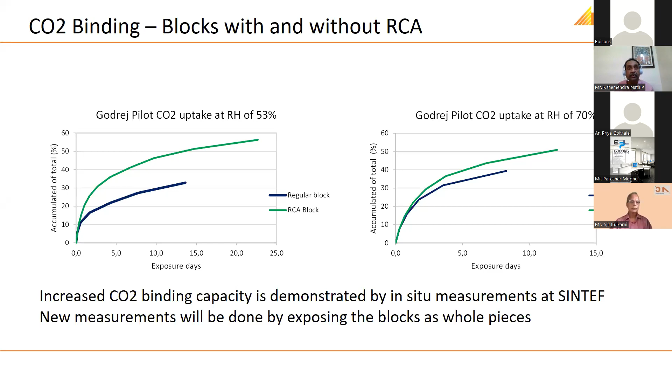Finally, one more interesting project for L&T in Ulwe, New Bombay. They bagged one of the biggest packages under the Prime Minister Awas Yojana - 5,000 crores with a built-up area of more than 17 million square feet. Out of the 17 million, around 4.5 million square feet of projects used the precast large concrete panel system, for which a huge factory floor had to be produced. We used recycled aggregates from Thane, transported them all the way, and put them into the concrete there.

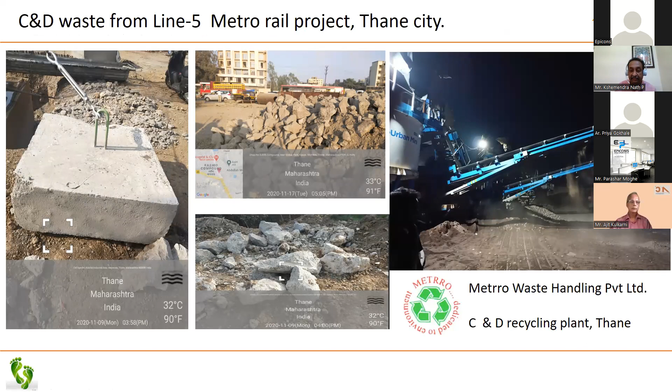So here is the plant - what you see on the right is the plant I showed you in the video. We sourced aggregates from concrete from the metro line in Thane, and transported it to Metrro Waste Handling, which is the name of the C&D waste handling organization. We periodically tested it the same way we tested material for Godrej, and it was used in the grade slab. So here you see how the material was monitored, certified, and then used in the concrete.

So more than 490 cubic meters of concrete was laid using recycled aggregates from Thane into this. And after a year, we went and looked at the concrete, and it was looking very good, super good. We used more than close to 270 metric tons of RCA. We could have used more, but unfortunately, there was no feedstock coming into the plant. And this is a very typical example.

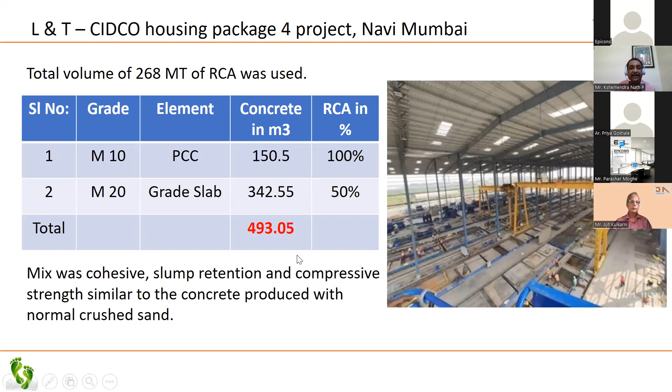Water everywhere, but not a drop to drink. There was no good quality feedstock of concrete available at the recycling plant for us to get it. Otherwise, we would have done more of it. So in conclusion, I would say that use of recycled aggregates helps in safeguarding the environment, because if we don't do it, then we are definitely damaging the environment beyond imagination.

For this to be effective, you need good government policies, not just on paper, but effectively executed. Until and unless we do that, we will not be able to make a successful investment in C&D waste management plants. Recycled aggregates have got a huge potential to partially replace the fast depleting natural aggregates. We did a case study in Mumbai, and we know that roughly about 30% of the natural aggregate can be saved if we were to convert that into recycled aggregates. So that is the kind of potential we have.

And we should use a mix of regulations and standards to set the framework, and also guide the private sector to adopt good practice. Because one of the key things is to make sure that we have a robust quality system. It is properly documented, it's certified, so that a structural engineer or the builder or the owner of the structure is at ease, knowing that this can be used without any issues.

So if we don't do that, the alternative is that we find another planet to live on, because business as usual is not going to help us. With this, thank you very much for your attention.

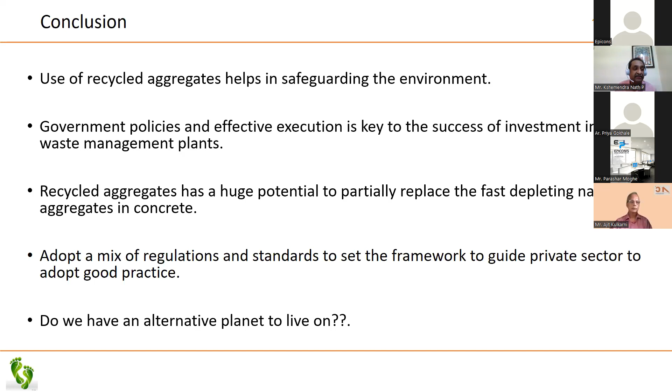Yeah, the lecture was quite revealing. In the sense, I thought that there should be no construction anymore, but that cannot happen.

I can't hear. Are you able to hear me now? Are you able to hear? Yes, we can hear you, Parashar. I guess the sir is not able to hear. Yeah, yeah, okay.

So, but just one question that I had in mind. See, how many times can we recycle concrete? In the sense, we recycle the fresh concrete during demolition, convert it back into blocks. Now, can it be again reused? Is there, because at one point of time this is going to grow old? Say like 30 years. So how many times do we feel that this can really be recycled?

See, the biggest issue we need to address in this is the transition zone, where you have the old concrete clinging on to the aggregate surface, and that actually interferes with the bond, and also generates higher water demand. So as long as we can have effective solutions to reduce the clinging concrete onto the aggregate surface, and 30 years from now, hopefully we'll have better technologies to make sure that this is also addressed. So I think we'll make the first step, and then take it when we reach there.